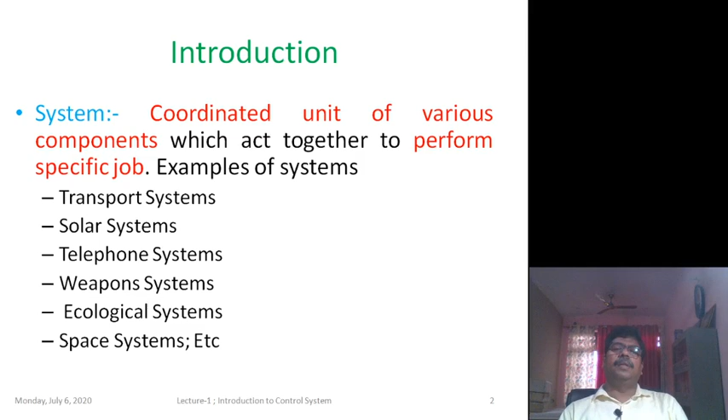So basically, the systems are two types. One is a physical system, another one is a non-physical system. And physical system can be further classified as electrical system, mechanical system, chemical system, and many more.

So, in which the specific job is related to electrical output, mechanical output, and chemical processes, and then their output. Similarly, many more systems exist.

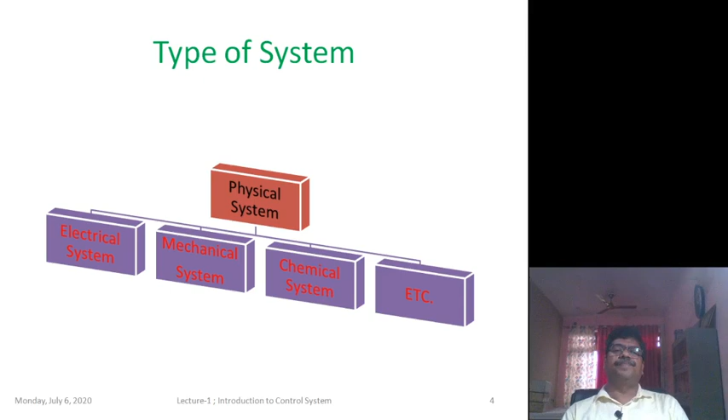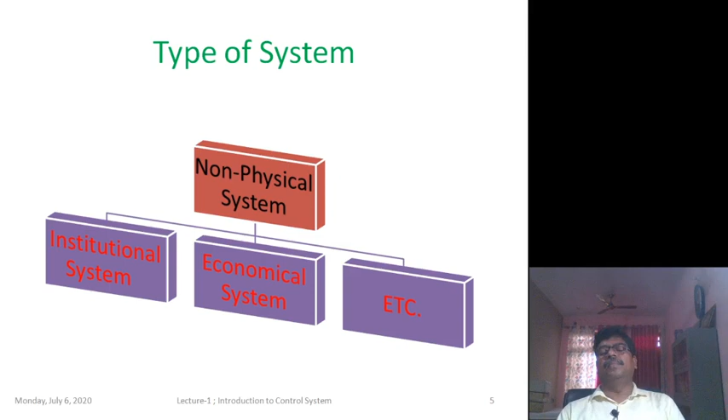While in non-physical systems, as I have given the example of academic institutions, there is an institutional system that may be any type of institution, economical system, and many more.

Now coming to the control system. What is control system? So like a system, we can here see that control system can be defined as a combination of various subsystems which control a set of quantities with respect to a reference quantity or input variable.

The quantity that is controlled is called controlled variable, and the quantity which is input, or with respect to which, is called a reference variable or reference value. So basically in a control system, we control a set of parameters or quantities with respect to some reference to get the specified output.

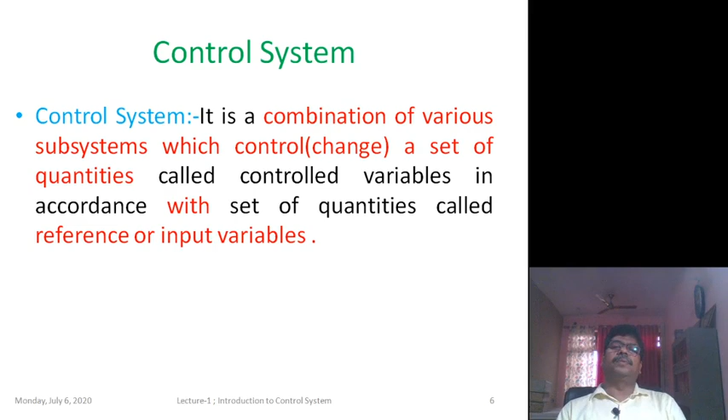Specific examples of control system in electrical engineering and electronics engineering and many more: the position of shaft of a motor, speed control of the rotor, control of the position of radar, control of the plane, automobile, lots of examples you can observe in your daily life.

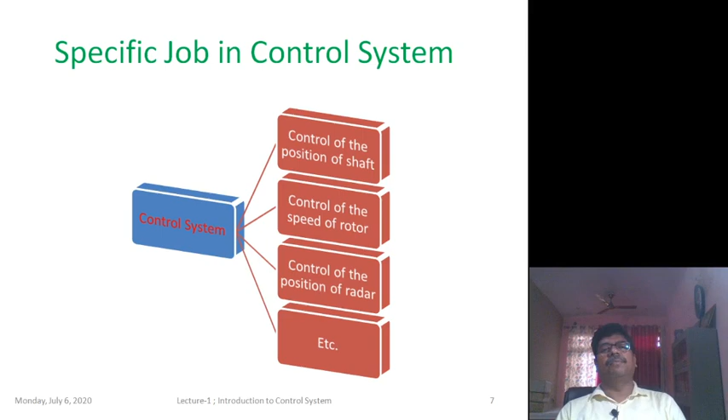So to have a control system, there are basically three steps. First one is modeling, second one is analysis, third one is design. So any system we have to design, we have to model it, then analyze it according to our requirement.

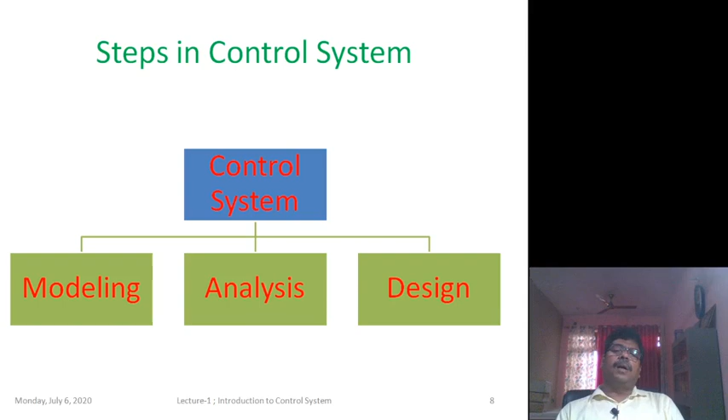If analysis is okay, then we will move towards the design, and if design is okay, then we will move towards the prototype. If any step is not fulfilling the required specification or desired output, then we will move back to the last step or first step, that is modeling.

So there are many approaches of modeling. Basically it is classified in two ways. First one is conventional approach, second one is modern approach. In a conventional approach, one can adopt either differential equation theory or transfer function theory. In modern approach, state variable and many more.

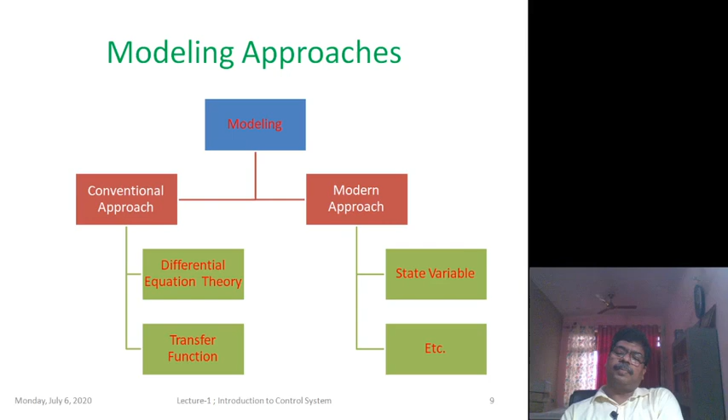So this is the first step for obtaining a control system. Means either we can use the conventional approach or modern approach depending upon our choice and availability and skill we have.

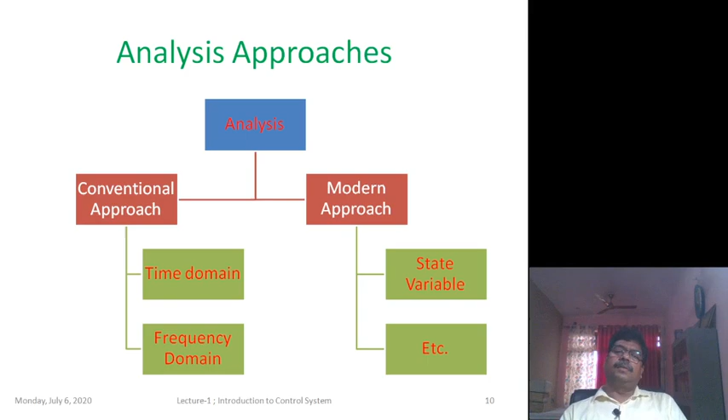Next one is analysis. Analysis can be further classified in two ways, that is conventional approach and modern approach. In the conventional approach, basically two types of analysis are done. One is time domain analysis, second one is frequency domain analysis. While in modern approach, state variable and many more.

Now, the third step is design. Design can also be done in two ways. First one is conventional approach, second one is modern approach. Conventional approach: Bode plot method, root locus method, Nichols chart method. While modern approach is pole placement, optimal theory and robust control theory.

So these are the various approaches. So to obtain any system or any control system, we have to go through the three basic steps. First one is modeling, second one is analyzing, third one is designing.

So if modeling is okay, then we will analyze that model, that mathematical equation, and if analysis is okay, then we move towards the design. If not okay, then we will go back to the modeling and rethink and remodel, and then we will go to the next step, means analysis.

Analysis is done. If it is okay, then we will move to the design, and if design is okay, then we will move towards the prototype modeling. If prototype modeling is working, then we will move to the pilot project level. So this is the way we can design any system, especially the control system.

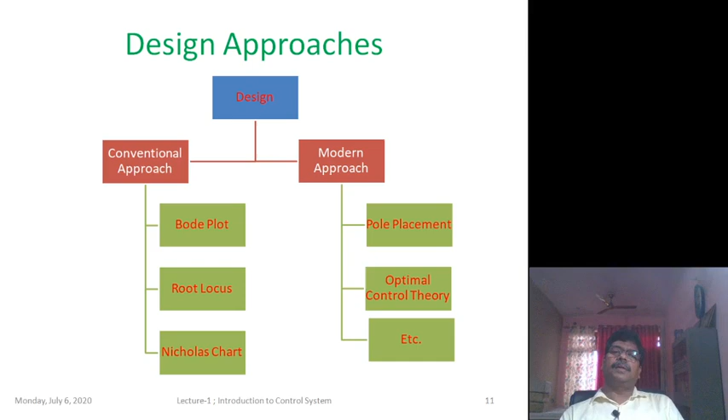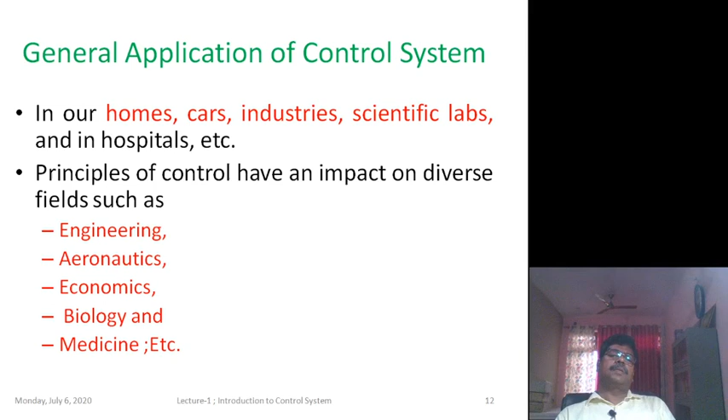Now general application of control systems are in our homes, cars, industries, scientific laboratories, and these have a vast impact on engineering, aeronautics, economics, medicine, and others.

Specific applications of control systems can be seen in flight control systems, robotics, chemical process, industrial process, and automotive. These are the specific applications of control system.

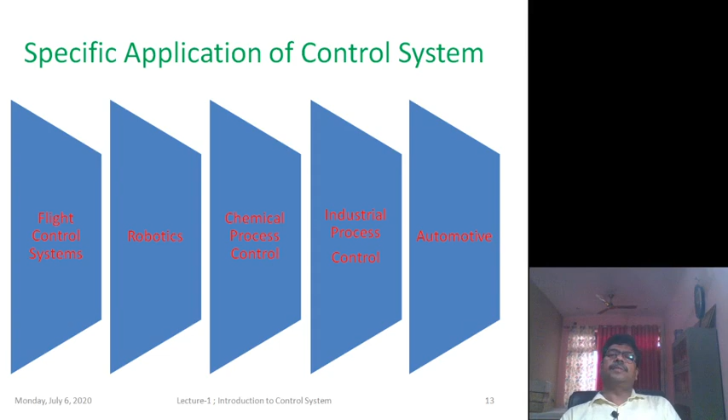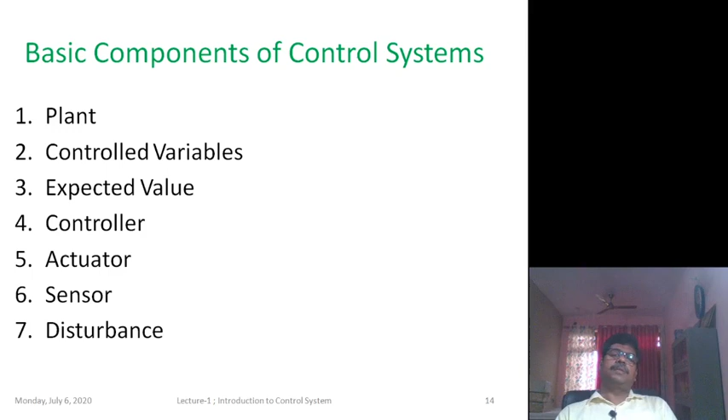Like other systems, control systems have some basic components. First one is a plant, second one is controlled variable, third one is expected value, fourth one is a controller, fifth one is actuator, sixth one is a sensor, and finally there may be disturbance in the system, so disturbance can also be considered.

So what is a plant? Basically, plant is any physical system that is to be controlled by a controller. It is the heart of the system that gives the output. If there is any parameter variation, then we have to put the controller.

So next one is controlled variable. The variable controlled by a controller, considered as a system output. That is a controlled variable, the variable which is controlled.

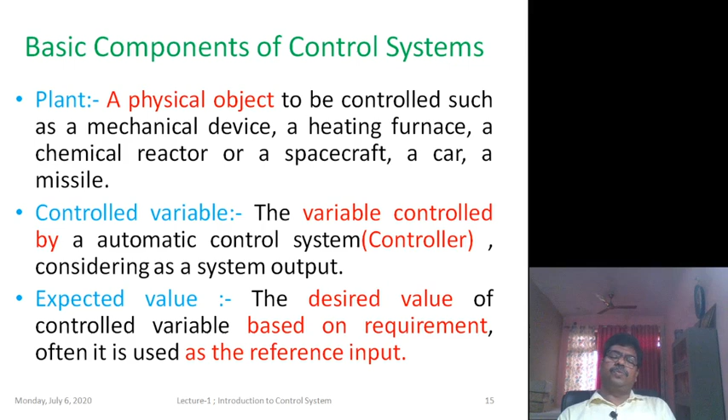And controller is a unit that can compute the required control signals. So basically a controller gives a control signal.

And next is actuator. What is actuator? Basically, it is a mechanical device which converts energy into some kind of motion. Usually, energy may be air energy, electricity, or any liquid.

And then sensor. What is a sensor? A device that measures a physical quantity and converts it into a signal, which can be read by an observer through an instrument. So this is a sensor.

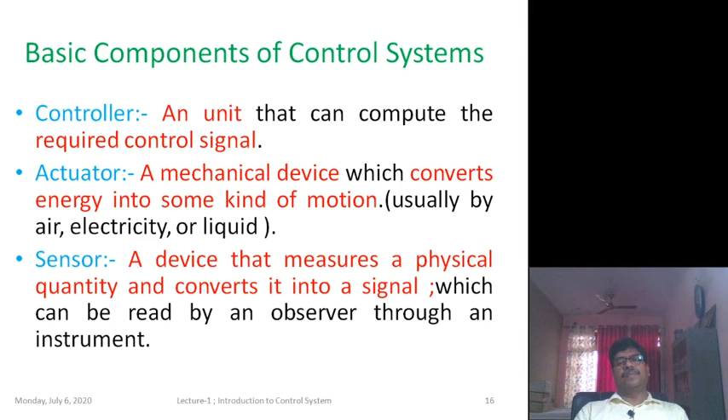And finally, there may be disturbance to the system. That is an unexpected factor disturbing the normal functional relation between the controlling and controlled parameter. So these are the 7 basic components of control system.

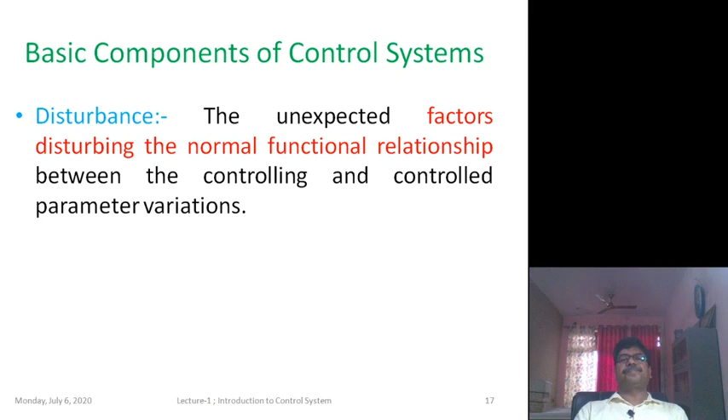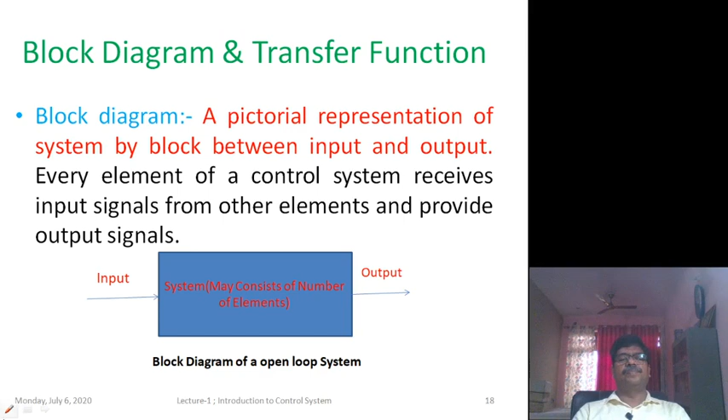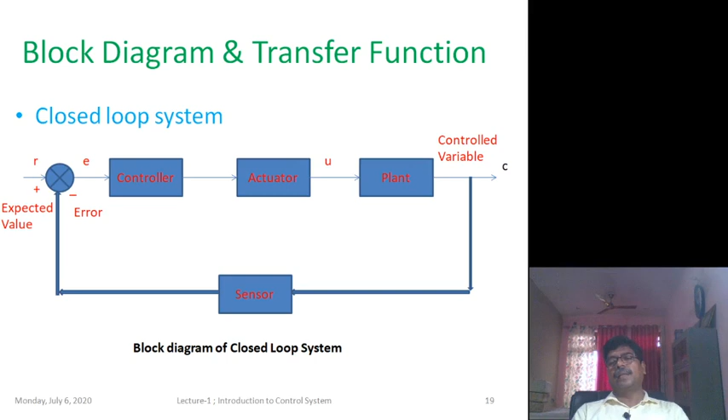If the output is as the expected value, then it will keep on working in a stable mode within the tolerance band. If not, then this feedback signal will be processed again and the error is minimized, and it keeps on working.

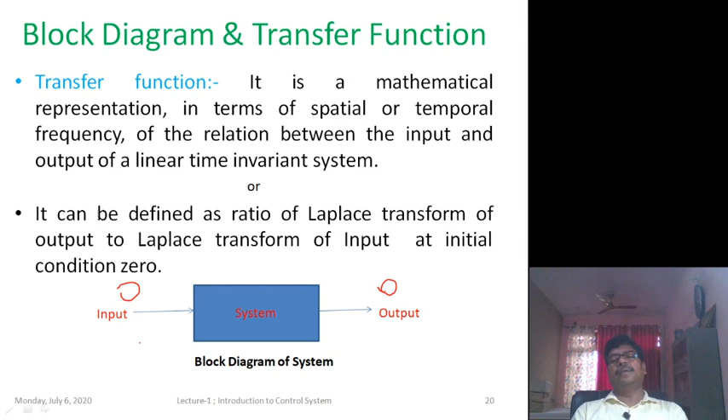Now the transfer function. Any control system's transfer function, for a linear control system, can be defined as the Laplace transform of the output to the Laplace transform of the input at initial condition zero. So here it is the output. This output's Laplace transform is obtained, then the input's Laplace transform is obtained. So Laplace transform of output to Laplace transform of input is defined as the transfer function.

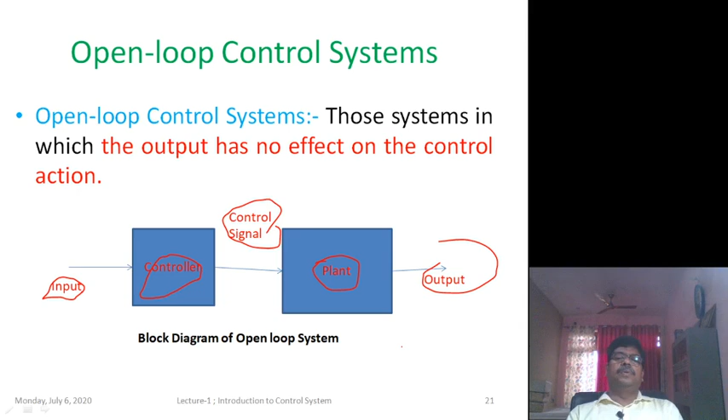Here you can see the output is neither measured nor fed back for comparison with the input. So for each reference input, there corresponds a fixed operating condition. Basically, in this case, accuracy depends on the calibration of the system. The output will be accurate as long as the system is properly calibrated, and as the system parameters do not vary with time, that will give an accurate output, meaning accuracy will be high.

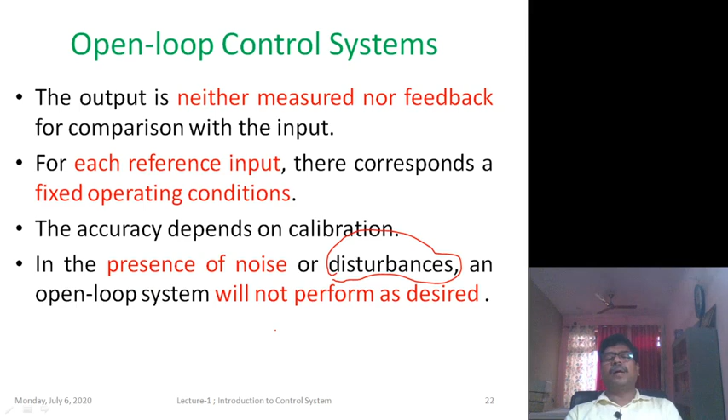While in presence of noise or disturbance, there might be chances that its performance may deteriorate, so performance will not be as desired.

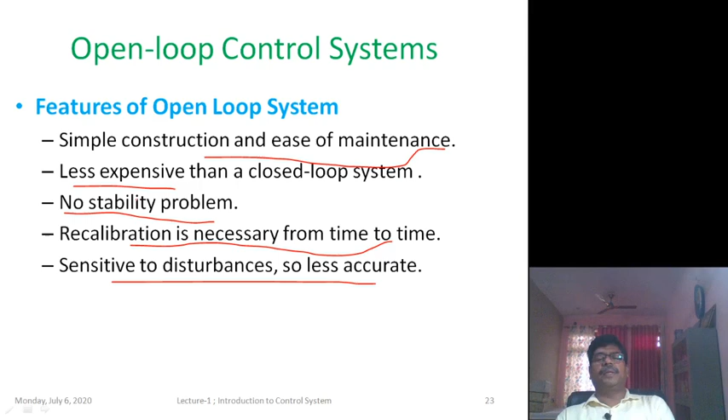Features of the open loop system: it is very simple and maintenance is very easy, less expensive, no stability problem, but recalibration is necessary from time to time, it is sensitive to disturbance, and so less accurate.

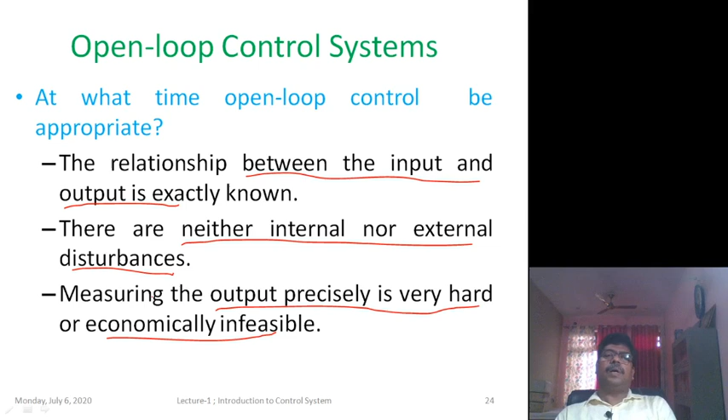When should we use the open loop system? When we know the exact relationship between input and output, when there is neither internal nor external disturbance present, and when measuring the output precisely is very hard or economically not feasible, then we will choose the open loop control system.

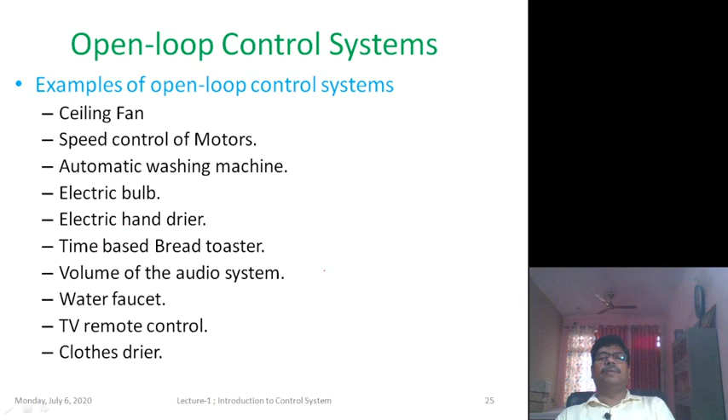There are lots of examples of open loop control systems. One can see ceiling fan, speed control of motor, automatic washing machine, electric bulb, hand dryer, time-based bread toaster, TV remote control, clothes dryer. So there are lots of examples of this control system.

Now to the closed loop system. It is also referred to as a feedback control system because the output is passed to a summer for comparison at the input side. So a signal from the output is taken and given to the summer at the input side, and comparison takes place. Basically, the comparison of actual output with the reference takes place, and it's designed to perform based on the error. This feedback is the foremost design point, and it is really very influential and powerful.

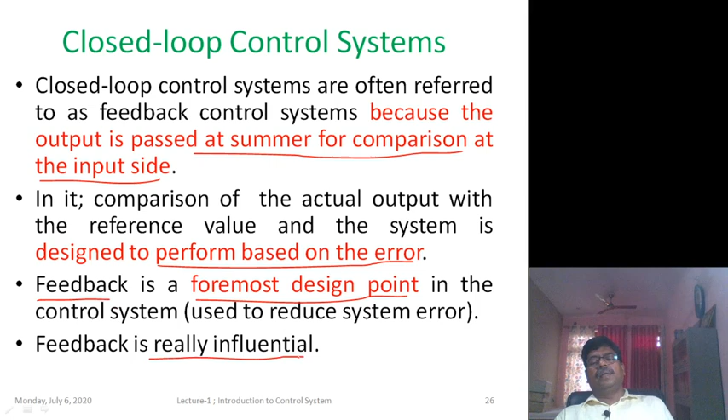Examples of closed loop system: our AI based air conditioner that continuously measures the room temperature, and when the desired temperature is obtained, its compressor goes into sleep mode. This way the air conditioner maintains the room temperature at a specified value. Similarly, automatic electric iron, servo voltage stabilizer in our refrigerator that maintains the voltage within the specified range, water level controller, and speed regulation of motor through a tachometer or current sensor, through a regulator or current sensor. These are the various examples of closed loop system.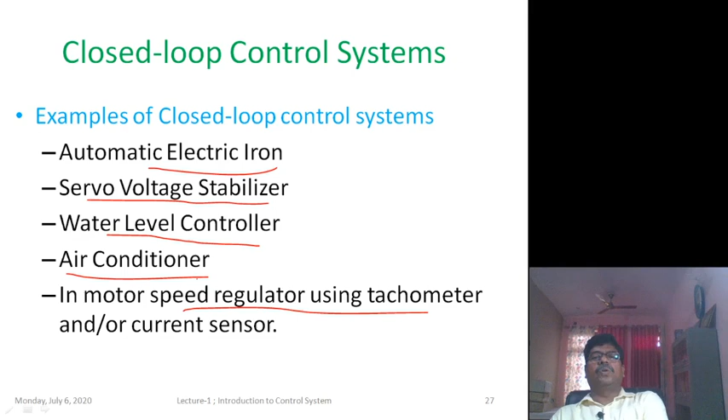One can see lots of advantages of closed loop system, and there are also drawbacks. Advantage: it reduces the disturbance effects because it works on the reduction of the error between the output and input. So if there is a noise or disturbance...

It takes care of these disturbances, and it is made such that it is insensitive to variation. If there is any parameter or parameter variation of the plant, the plant keeps on performing even though there is a change in the parameter, because it is designed in such a way that within a tolerance range, its performance is okay.

Normally, it stabilizes the unstable system, and there is a well-defined relationship between output and references.

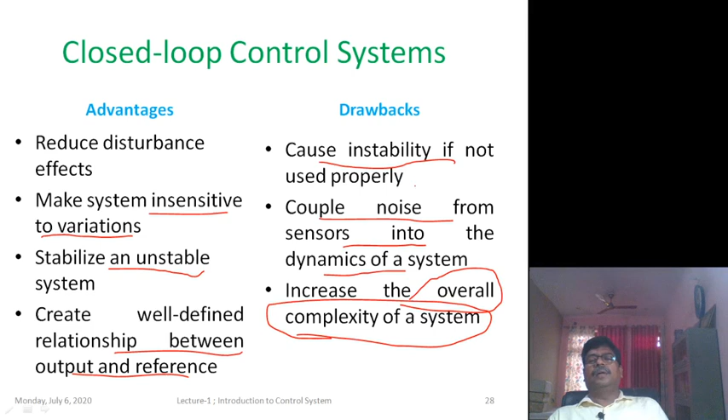So this is the drawback of the closed loop system.

So now we are in a position to compare the open loop system and closed loop system. One can now observe that the open loop system has a very simple structure, low cost, while the closed loop system, as you have seen, is complex and high cost.

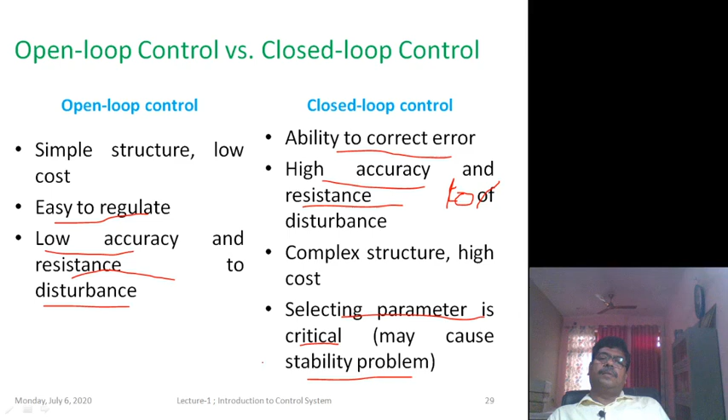While the closed loop system, you can see, has the ability to correct error, high accuracy, and resistance to disturbance. But it has a complex structure and selection of parameter is critical.

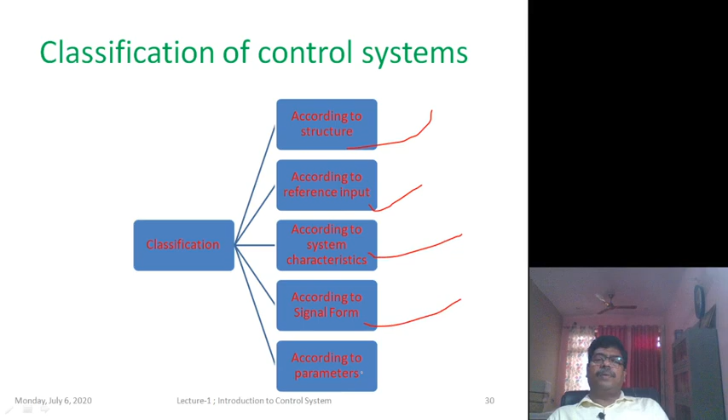Now moving towards the classification of control system. Basically, the control system can be classified according to the structure, according to the reference input, according to the system characteristic, according to the signal form, and according to the parameters. So first is according to the structure.

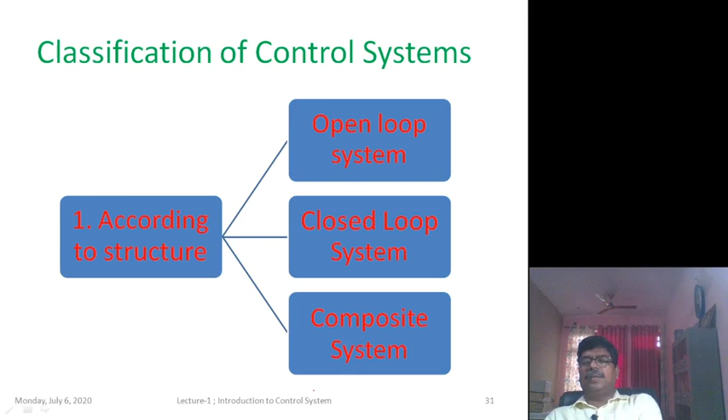As we have studied, the structure may be open loop system, closed loop system, or composite system, that is made of open loop system and closed loop system.

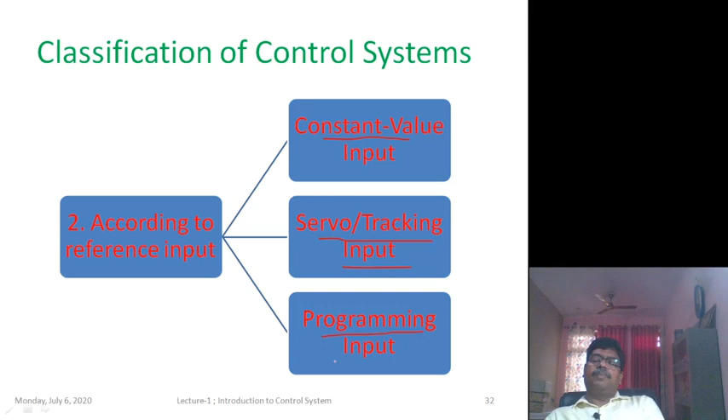According to the reference input, it may be constant, or it may be variable where you have to track the input, or program input that is already programmed. Here reference input, you can see, is a constant. The controller works to keep the output around the constant value, like temperature, pressure, or level.

While servo or tracking input are varying, the input may be unknown or varying. The controller tracks the varying references, like automatic navigation in our cars, or GPS in our mobile phone for tracking the path, and satellite tracking antenna.

And the third one is programmed input, meaning input changes according to the program that has already been done. The controller works according to the predefined command. It is like a numerical control machine.

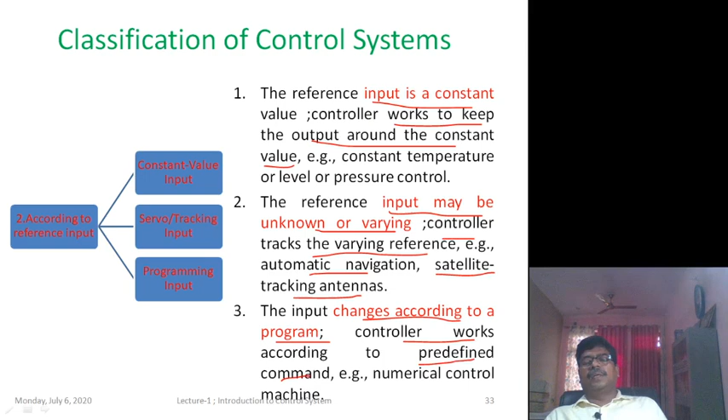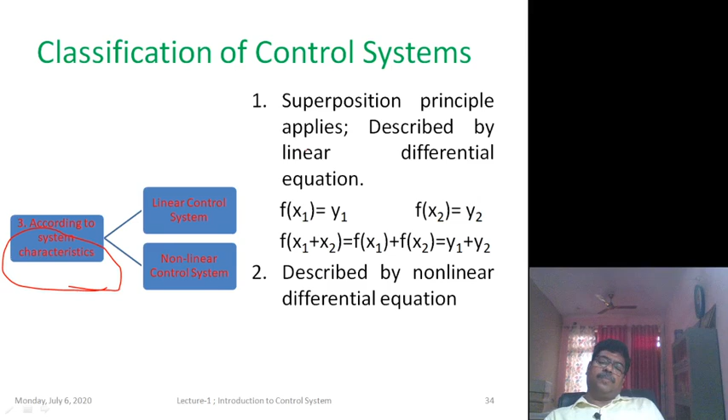So the system, based on the characteristics, can be classified as a nonlinear control system and linear control system. This control system series will be focusing on the linear control system.

Now, the fourth way to classify the control system is according to the signal form. Signal may be continuous control signal or discrete control signal.

In continuous signals, they are a function of continuous time variable t, while in a discrete control system, signals are in the form of either a pulse train or digital code, a digital control system. So this is the fourth classification, based on the continuous control system and discrete control system.

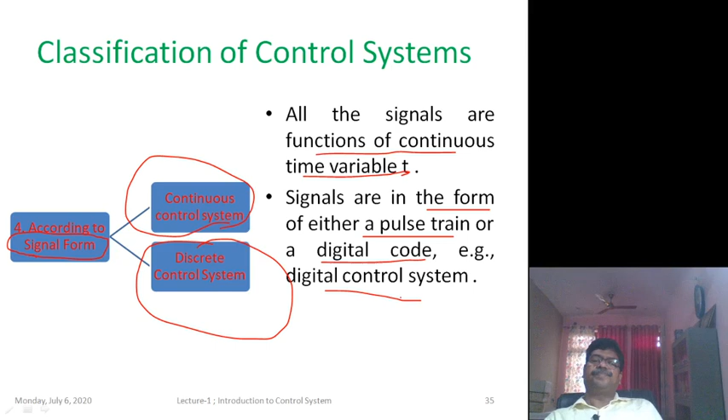Now the fifth one is according to the parameters. This is important: time invariant system and time varying system. So in this, what is a time invariant system? You can see the parameters of the control system are stationary with respect to time. While in a time varying system, the system parameters vary with time. An example of this is the guided missile control system: time varying masses result in time varying parameters of the control system.

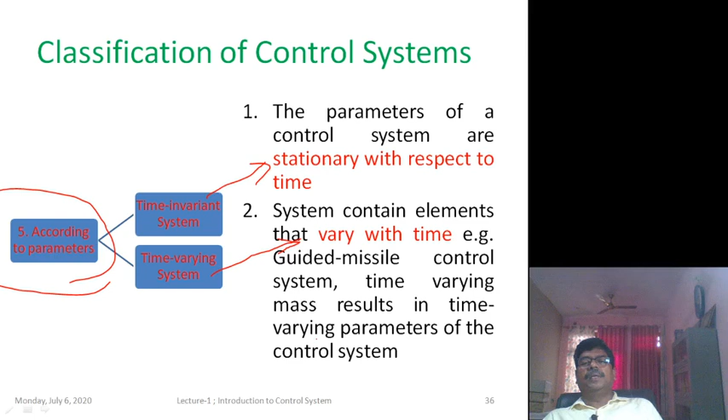These are the five classifications of the control system. Now why do we need a control system? Because we need a stable output, we need the response quickly, and we need the output as accurate as possible.

So stability, what is stability? The ability of the system to recover equilibrium, meaning it should become stable and the output should be as per the desired value. While quickness is the time of response, the duration of the transient process before the control system reaches equilibrium. So how quickly the transients die out, that is the quickness, the time of response for the output.

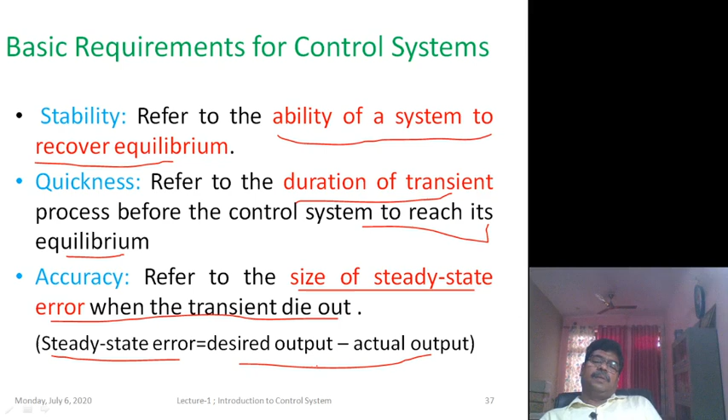And accuracy, what is accuracy? It basically refers to the size of the steady state error when the transients die out. If the transients die out, then what is the value of the output, is it the desired value or is there variation? If that variation is within the tolerance range, then it is okay. So basically, steady state error is equal to desired output minus actual output. That may be higher or lower.

Now, before completing this introduction to the control system, we must also know the historical development of automatic control systems. The first example of an automatic control system is the fly ball governor system for control of the speed of the steam engine by James Watt in 1770. So James Watt made a fly ball governor to control or regulate the steam in his engine.

Then after 100 years, Maxwell analyzed the dynamics of the fly ball governor system. During the First World War, between July 1914 and November 1918, there was a need for ammunition, heavy cannons, missiles, and guns. So for quickly positioning ammunition, we need a precise system that can position heavy masses. So during the First World War, lots of work was done in the field of control systems by various countries.

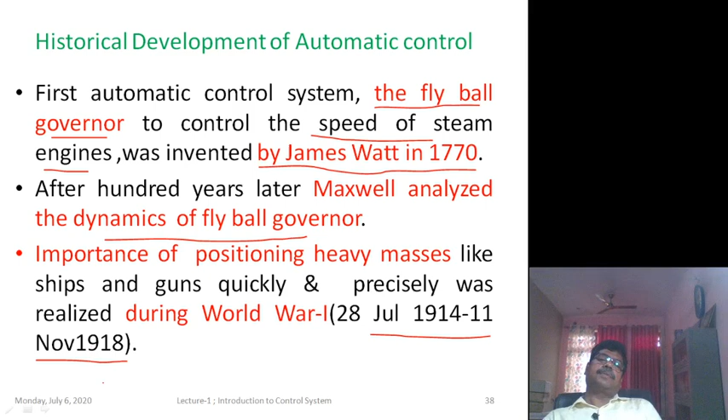In 1920, Minorsky performed a classical work on automatic steering of ships and positioning of guns on shipboard. Then in 1934, Hazen developed a general theory for servomechanisms. And in 1940, lots of work was done on mathematical and analytical methods for the development of control systems, and the control system was established as a specialized branch of engineering.

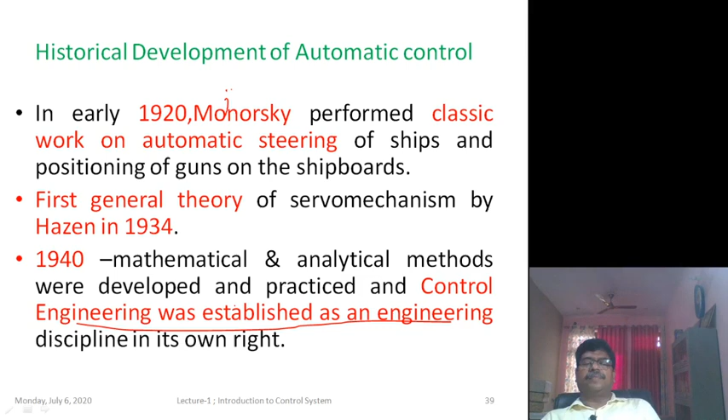And during World War II, again lots of work was done in the field of control engineering because it was necessary to design and construct automatic airplane pilots, gun positioning systems, radar tracking systems, and other military equipment. So during the Second World War, 1939 to 1945, lots of work was done, and by 1955 there was tremendous growth in the field of control engineering.

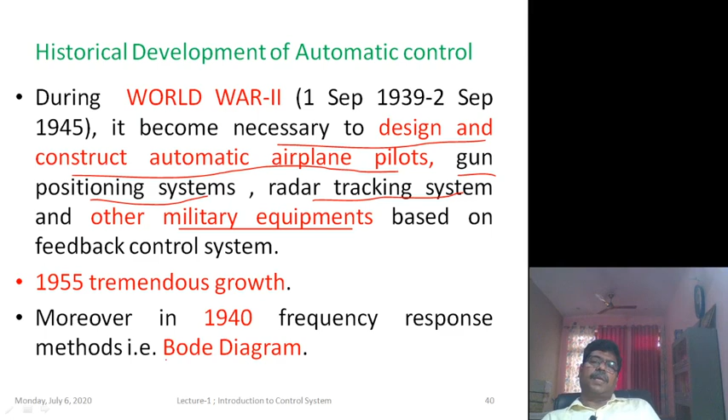Moreover, in 1940 Bode developed a diagram in the frequency domain for design and analysis, and then Evans developed the root locus method for design and analysis. In the late 50s, optimal control systems were designed in some meaningful systems, and finally, with the invention of digital computers, it became convenient to analyze complex time domain problems, which led to the development of modern control theory using state variables.

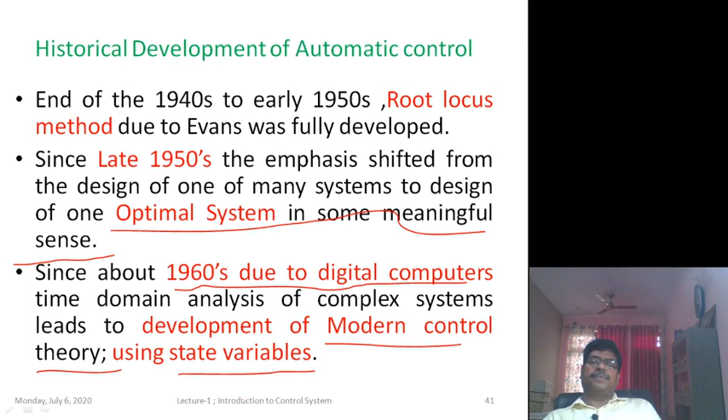Between 1960 and 1980, deterministic and stochastic systems as well as adaptive control systems were fully investigated, and from 1980 to the present, modern control theory centered around robust control has been developed. So this is the brief introduction of the control system.